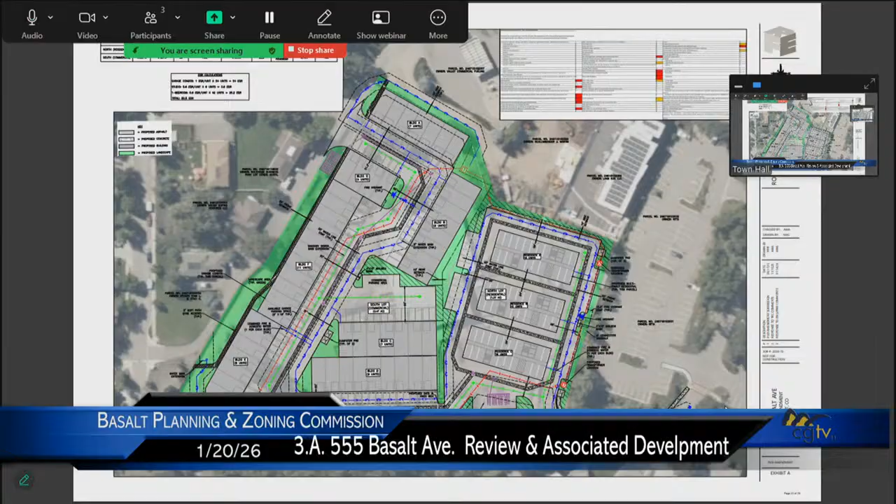The site subject to the application, as you can see on the screen, is a 4.84 acre parcel that currently houses Myers and Company. It's located in the Basalt Business Center South PUD, and it's located in the town's urban growth boundary. It's currently zoned industrial PUD, and it's partially in the Southside floodplain.

The proposal is to remove the existing buildings from the site, construct 54 commercial storage spaces on the south edge or south half of the property, as you can see in these buildings here. And then also to construct 48 multi-family residential units in 3 buildings on the north portion of the site, as you can see here.

Access is proposed to the commercial storage units from Fiou Lane on the south side of the site. And then access is proposed to the residential buildings from the existing driveway that goes to Cody Lane.

The property is located between the Basalt Park and Ride, which is located right here, and the Southside 4 subdivision, which is located on the other side of Fiou Lane. Of the 48 residential units, 12 are proposed to be deed restricted as category rental units, averaging a category 2.

And the applicants can go into more detail on the proposal as part of their comments. In reviewing the application, staff has identified a series of discussion items that are in your staff memo.

They include consistency with the master plan, the level and mix of affordable housing mitigation proposed, the exterior storage requirement waiver for the affordable housing, compatibility of the proposed use, building height, the pedestrian connectivity aspects of the project, Fiou Lane, access to East Cody Lane, and then traffic and the Southside floodplain and green building and wildfire mitigation requirements. So staff has introduced those in your staff memo that you have in your packet, and we'll go through them briefly here to give you an introduction to the discussion items.

The first being consistency with the master plan. The site is in close proximity to the Basalt Bus Rapid Transit Stop, or BRT stop, and has an opportunity to provide affordable housing in close proximity to transit to satisfy a series of master plan goals and objectives. However, the property was identified as existing land use on the master plan's future land use map.

You can see it in this location. So essentially, it was not envisioned for redevelopment during the life of the master plan when the master plan was adopted in 2020.

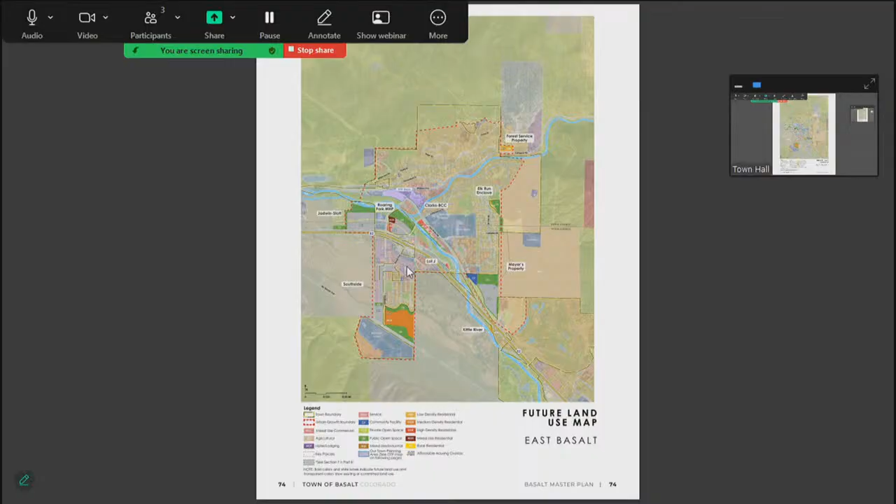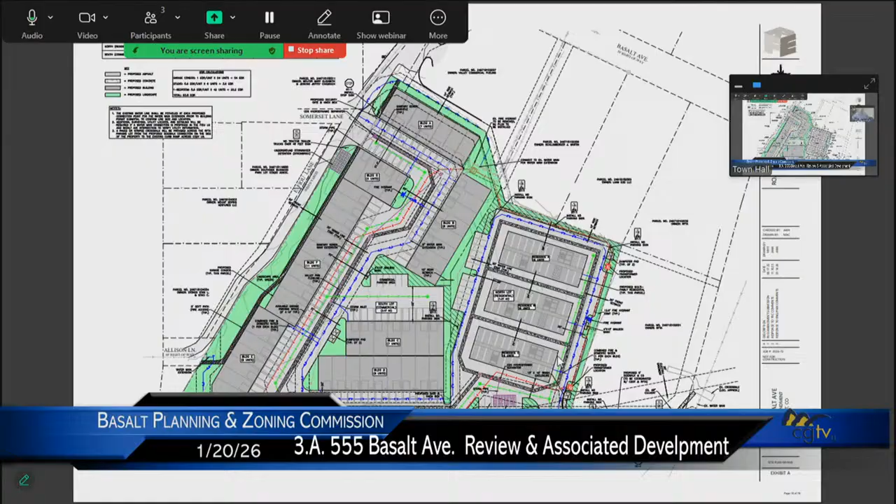A master plan amendment is required to change that designation. The typologies in the master plan identified the property as work mixed use, which envisions residential intermixed with commercial. But as noted in the site plan, the applicants have proposed that residential and commercial uses be fully separated in the project, so an amendment to the typologies would also be needed. The master plan amendments are being evaluated concurrently with the land use actions.

Going back to the discussion items, the level of community housing, affordable housing being required is a discussion item. The applicants have proposed for 12.

Could you speak louder? I really can't hear anything. Would you guys like to maybe... I don't think it's going to help.

The level of affordable housing being proposed is 12 units of deed restricted housing averaging category 2. They're proposed to be all rental units, and all of the deed restricted units are proposed to be 1-bedroom units. You have floor plans in your packet materials. The project proposes for 25% of the units and 25% of the residential floor area to be deed restricted, while the code requires 20% of the units and 25% of the square footage be deed restricted.

The Basalt Affordable Community Housing Commission, BAC, is in the process of reviewing the application, and staff will provide an update at the next P&Z meeting regarding the BAC's recommendation on the level of affordable housing as well as the unit mix proposed.

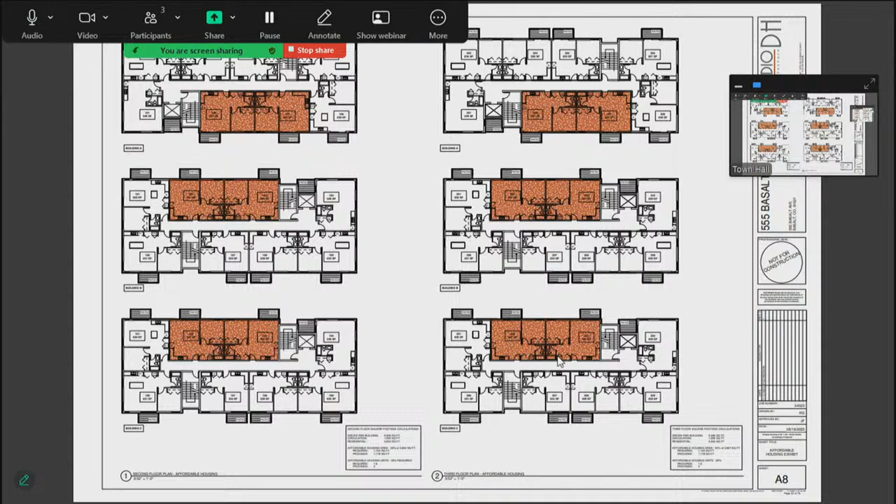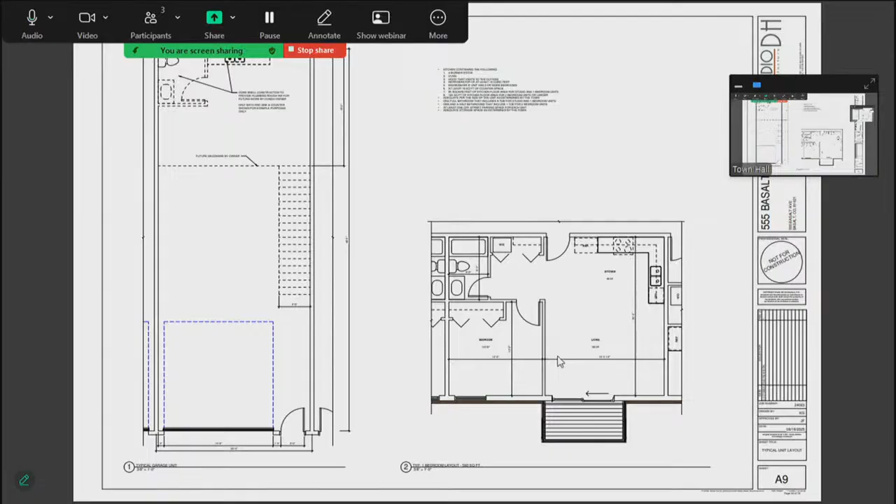With regards to the exterior storage requirement, the applicants have proposed for the deed restricted units to meet the livability requirements in the community housing guidelines, except for the requirement for exterior storage. The applicants have indicated that they can't provide exterior storage because the first floor of the residential buildings must remain open due to floodplain considerations, proposed to be open for tuck-under parking to allow floodwaters to go through the site.

In a flooding event, the Basalt Affordable Community Housing Commission is also in the process of reviewing the request for the waiver. Staff will report back on this to the P&Z at the next meeting with regards to the BAC recommendation. Other topics included the compatibility of use.

Both the commercial storage use and the accessory residential use are allowed in the industrial zone district, with residential being a special review use in the IN zone district. The master plan typology on the site would need to be amended because the current typology of work mixed use encourages intermixing of residential and commercial uses, but the applicants have separated them, with residential on the north side of the site and commercial on the south side.

In looking at the storage use, staff believes it's important that the storage remain bona fide storage because the parking and traffic generation in the traffic report are based on bona fide storage use, which would be lower than if the spaces were used as business spaces. Staff believes that's an important consideration.

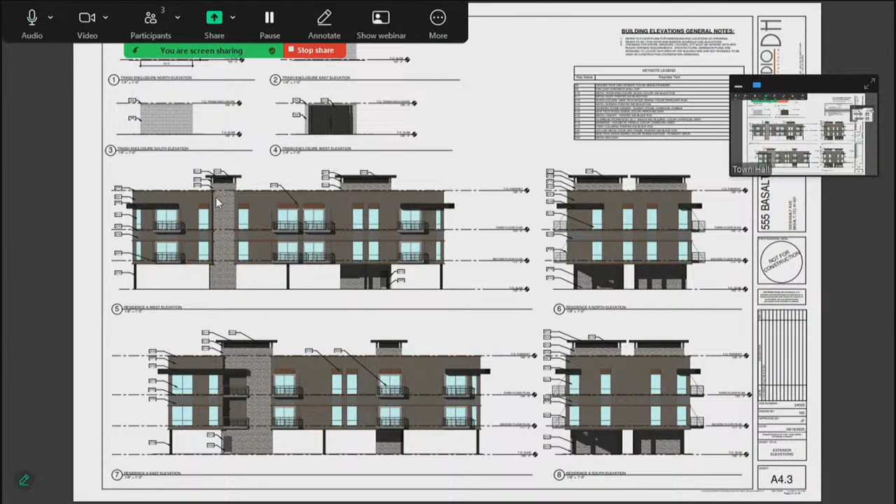Other discussion topics included pedestrian connectivity. As noted, the site is near the Basalt Park and Ride and the BRT station across Cody Lane, within a quarter of a mile. It could be a transit-oriented development, however it requires a strong pedestrian connection to the BRT, so staff has requested that the applicant establish such a connection.

The applicants did explore the potential to provide a pedestrian connection across the Basalt Park and Ride, but RFTA was not supportive of providing it across the Park and Ride. So the applicant amended their application to provide a sidewalk adjacent to the access road to Cody Lane so that it would connect to the crosswalk across Cody Lane for pedestrians to get to the BRT station.

Other discussion items relate to Fiou Lane, on the south side of the project. Fiou Lane is currently a two-way street, but it narrows down with a couple of pinch points. The police department provided comments in your packet about considering widening Fiou Lane as part of this project to better accommodate two-way traffic in conjunction with the development. The applicants have indicated they propose to maintain the current width and circumstance of Fiou Lane.

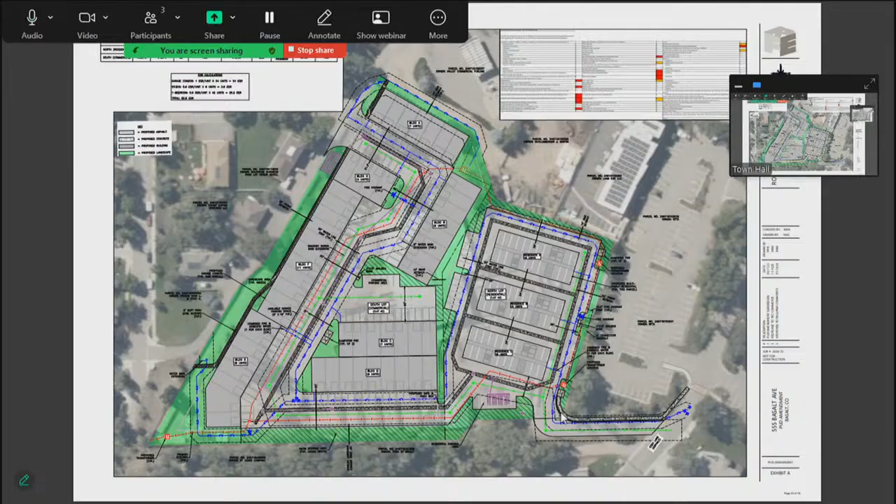The applicant has provided a traffic report in your packet materials. It indicates the development will not generate more traffic than the current Myers Steel operation, and as such would not have a negative impact on traffic at the Basalt Avenue and Highway 82 intersection.

Staff had Charlier and Associates do a third-party review of the traffic study, and his comments are in the packet materials. Charlier identified a concern that the current site traffic generation is only based on one day of traffic count in May 2025, and that a broader review of existing traffic generation is typically necessary to understand current traffic counts. The applicant's traffic engineer will be on Zoom this evening and can provide clarification on his traffic counts and methodology.

We can have Charlier and Associates attend a future meeting if P&Z desires further discussion on their comments. Staff anticipates conditions will be needed at a future meeting related to requiring contribution to the Basalt Avenue/Cody Lane mini roundabout and laneage changes, identified as a short-term solution to build capacity at the intersection. Other developments have contributed to this requirement. Additionally, it's important that the storage use remain storage and not morph into some other business use, because the traffic projections in the traffic report were based on the storage use, which has relatively low traffic generation rates. That's an important consideration in potential conditions of approval.

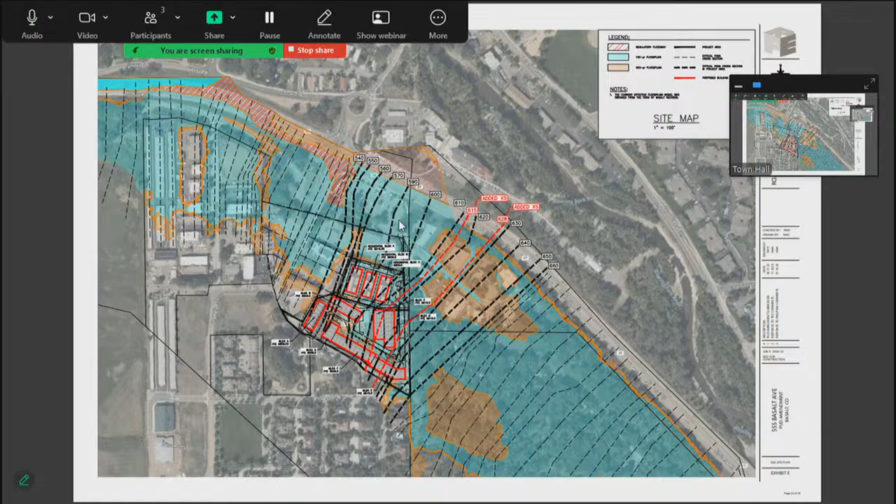Other topics include the south side floodplain. The site is partially in the south side floodplain, which goes from south to north back towards the river. The applicant has worked with the town's contract hydrologist, Robert Crable of Matrix Design, to come up with a site plan that could be developed without increasing the base flood elevation on the site. They've done so by using tuck-under parking, which allows flood flows to go through the property during a flooding event. Matrix Design believes the proposed site plan would not increase the base flood elevation and would meet the town's requirements for floodplain development.

Other topics included green building and wildfire mitigation, discussed in your packet. The applicant would be required to meet the sustainable building regulations in place at the time of the building permit, as well as the wildfire mitigation ordinance. The wildfire mitigation ordinance will need to be updated shortly because the state has passed a new wildfire code, and it requires local jurisdictions to adopt the provisions of that state code.

It is anticipated that any conditions that would be reviewed would require that they meet the wildfire mitigation standards at the time of building, and that's being updated.

So this evening, staff recommends treating this meeting as an introduction to the proposal and discussion items, considering applicant comments, taking public comments, and providing initial P&Z comments on the application, as well as identifying what additional information P&Z might need at a future meeting. Staff will also produce draft conditions of approval for consideration at a future meeting.

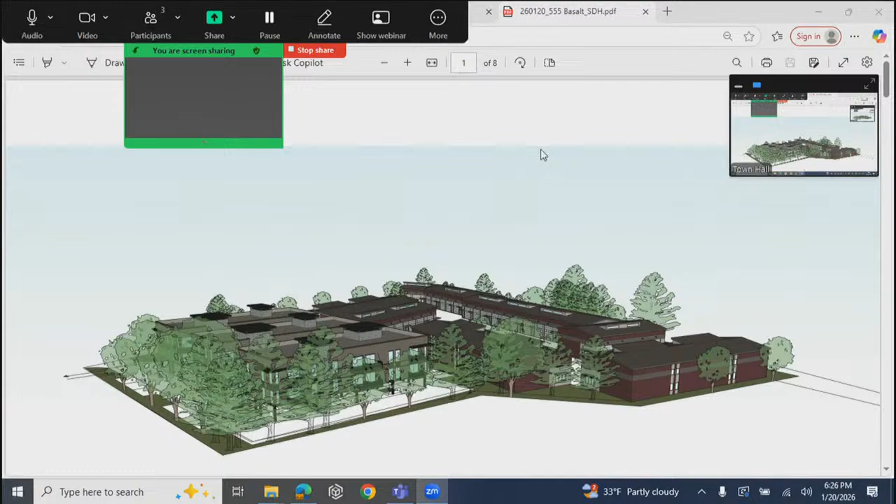So staff would suggest at this time taking applicant comments. Good evening, everybody. So we've got up on the screen a conceptual rendering of the fully built-out project.

James, I'll have you just jump to the next page. So I've included two aerials. One, at the top right, shows proximity to downtown — we didn't really catch the high school in that one, but the storage to the west — just kind of showing where we are on the site. The one on the left is a little bit more zoomed in.

So we've been working with Michelle and James for about 18 months now. We've had a lot of back and forth on this site, and the two really tricky parts of this site when we first started were the floodplain and the traffic.

We had a south side traffic study, and I think as we looked at this development, anything we looked at was about keeping traffic to what it currently was or reducing it further. That's kind of what resulted in the uses we looked at that could be available on the site within the given Business Center South zoning, and what could be placed in that area.

As James mentioned, it's currently being used as Myers Steel, a heavy industrial use that has had between 60 and 100 employees as this process has gone on. They have daily trips from both deliveries for their steel materials and also their finished product going out to construction sites.

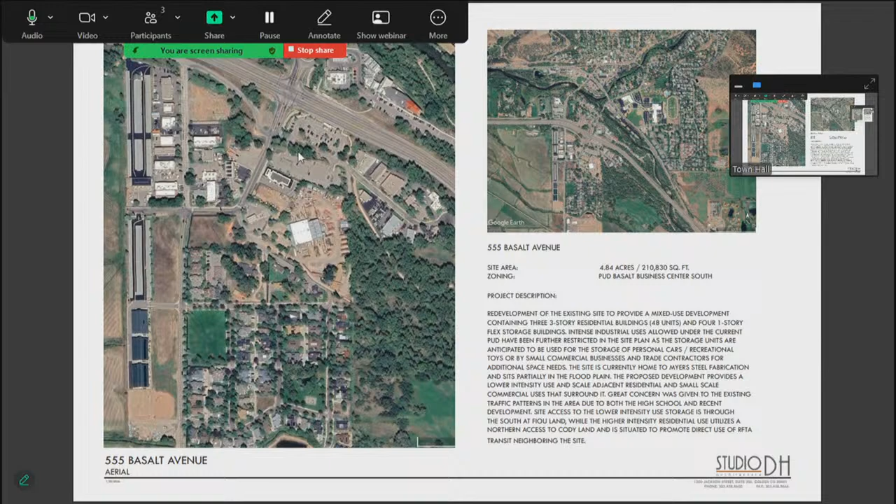This development would remove that use and have a little bit less intensity as far as construction, trucks, and traffic during the day. Just outlining the site, we've got residential uses to the south and southeast, light commercial uses to the northeast and west, and the RFTA Basalt Park and Ride to the north.

So in working with this site plan, we went through about 5 or 6 different iterations of how we could lay out the buildings to not affect both upstream and downstream neighbors with the floodplain.

Ultimately, we settled on this layout because currently you've got the 3-story mixed-use building just to the west — I believe it's an architecture firm with residential above it. We felt that the height allowances and size of that building fit in nicely with the size of our proposed building. Also, having the residential units closest to the park and ride to promote public transportation gave us the best layout.

The storage use to the south, we felt, would be a little bit shorter in height and also less intense in use, so being right up against single-family housing and some residential uses to the south gave us a stepping and scale to the south. We also tried to create a bit of a north-south arrangement for snow melting and snow plowing, which is how we got to the plan we arrived at.

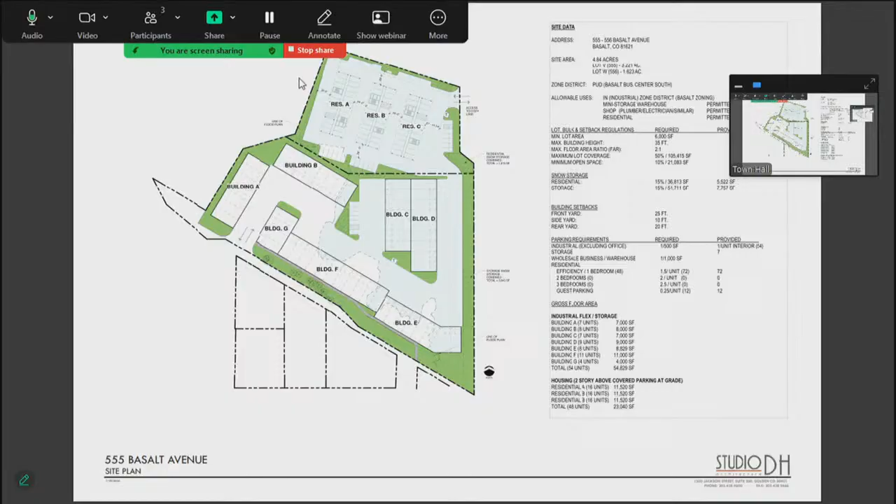We also based the number of residential units on the overall traffic counts. We are exceeding the amount of residential units that would need to be created by a commercial development of the storage nature, which we think is a benefit to the town. It could be further reduced, but we didn't feel that more storage or commercial uses would help the proposed development — it would just lead to more traffic intensity. So this is what we settled into from both a developer pro forma look and a traffic use look.

I'll have you jump to the next page.

I'll touch on a couple of things James mentioned, and I'm sure we'll get into this more. Few Lane was a big topic of discussion. Both the current owner of the Myers Steel site and a few neighbors have expressed concern about the narrowing of the street here.

We're dealing with a lot of mature trees in that area, and also a daycare on the adjacent property, plus industrial trucks coming and going. So what we did is push the access to this site as far up the road as we could to allow for that.

We looked at probably 3 or 4 different layouts of what would be required to meet the minimum street width requirements for Basalt. It would result in essentially losing all of those trees, and it would push into the applicant's property, probably 12 feet in some areas because it narrows down.

Can we jump back two slides? At the request of the fire department, but also I think both the neighbors and the applicant have seen it—there is a 5-foot soft path that goes behind the backside of those buildings. It could be used by pedestrians, but also by emergency services if there was a fire. It also creates wildfire separation between the building and vegetation, so it really serves a lot of purposes on that side.

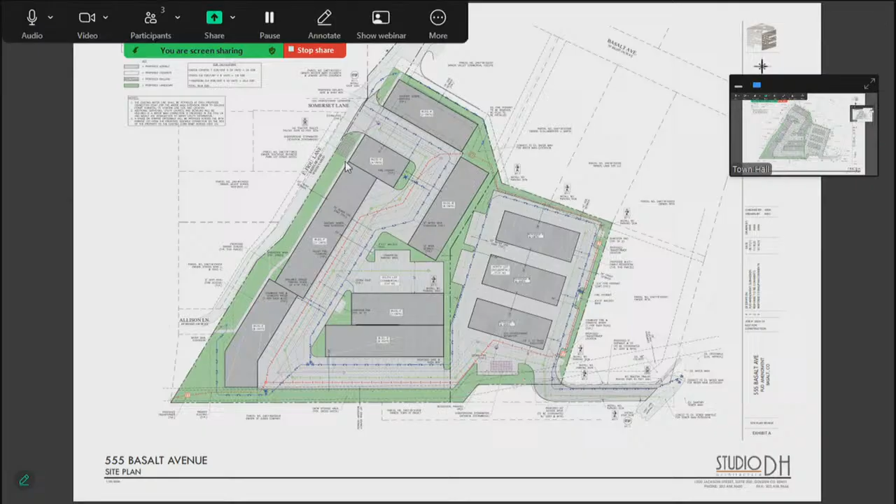We can jump to the next one. You can see some of the trees we'd be looking at—they're some of the tallest, most mature trees in the Business Center South District. We did have an arborist visit the site and do a tree inventory, so we've tried, with our landscape architect, to preserve the ones identified as having at least 50% or more life remaining, as part of this application. That was included in our submittal documents.

I'll jump to the last one. We included this just for discussion of that CDOT connection. This is, again, a tricky little corner—we've got a drainage ditch, a mailbox, and some site utilities. So for connecting that sidewalk, we are working with CDOT, with RFTA, and with the drainage company to figure out the best way we can connect, since we can't go through the RFTA lot.

I included that in the top right, I don't know if you can see it. We even looked at going down the south side of the RFTA lot, and we've got another transformer there and a lot of vegetation.

So we looked at wrapping people back around to Basalt Avenue and then down Cody Lane, but it's just really tight in that area. I feel we've made a lot of effort to find the best way to lay this out to provide that connection, and we're going to continue to work with CDOT. But that CDOT access is about 28 feet wide, so a 2-lane street and a sidewalk is getting pretty tight in that area.

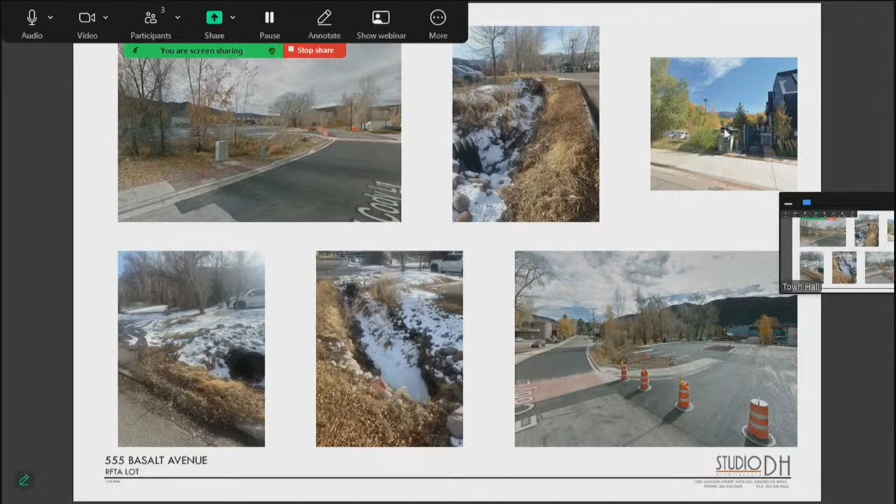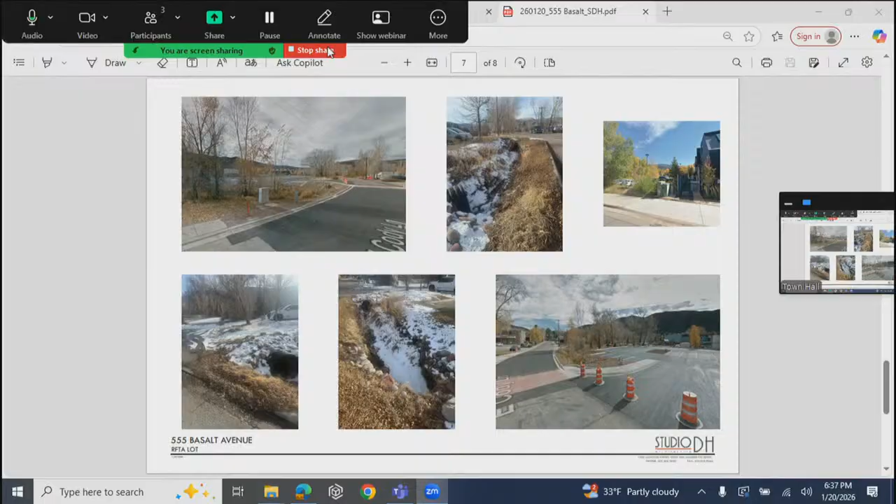I think I've touched on most of the major elements because we've got a lot to discuss, so I'll leave it at that. We've got the representatives for the owner and the engineer as well, we can go from there. The last page just has 3 more views from each direction to get a better understanding of the landscape and building height.

I'll touch real quick on the building height. The allowable height is 35 feet. My understanding with the zoning code is that's to the top of the roof. We have a 3-foot parapet wall extending up past that, so I believe it does meet zoning code height. It's just that the parapet wall extends up.

One reason is to screen any mechanical equipment up on the roof, and also for banking of snow so it's not falling off. The stair tower and elevator towers, I also believe, have the exception to exceed height because of the overruns and fire department requirements to access the roof. We'll leave it there, and we're open to any of your questions.

I can dig into that further and get you an answer. It's curious because it doesn't really make sense that you can't store, but yet we're building all these storage units on the same level. I believe what we've done with the grading plan and the way storage lays out, 3 of the 4 buildings are actually out of the floodplain because the grading changes how that floodplain works. We can take further mitigation by doing concrete foundations or extra waterproofing to help protect the storage unit side.

The difficulty is meeting the parking requirements for 1-bedroom and even 2-bedroom units. If we went up to 2-bedroom and bigger units, we start losing on that lowest level parking spaces throughout the site. So it's a balancing act of more units, more parking, more storage. I think we settled into how do we maximize units versus providing 5x5 storage closets at that lower level.

When in May was the traffic count done? Was school in session? My understanding was that it was. Okay, and so early May you said?

And what about construction traffic projections, is that included at all? Because that will be quite impactful during construction. Once this development undergoes construction, do these traffic projections include how many vehicles would be going in and out all day trying to build it? I don't believe they include that at this time. The town requires a construction management plan for that, which will be discussed later, but not until after approval, so there's no way to have any input on it?

That was it basically, except I'm not clear, you were talking about using Cody Lane instead of Few Lane as eventual access for residents, and I wasn't clear because you were saying one potential egress has a transformer box and vegetation, so where exactly would people go off of Cody Lane? That was for the pedestrian path.

So currently we have it on the west side, or the plan north. We're showing the street on the bottom of the page, and the sidewalk would wrap around right there where James is highlighting it. We wanted to keep it on the closest side to the residential, but that's also where the drainage ditch is. Oh okay, so it was just the pedestrian traffic you're talking about diverting, not vehicle traffic. Got it.

Okay, those are my questions for now. All right Mike, do you have any questions? Essentially you're having two very different access points for the two different entities. We wanted to split the uses so that we had residential and storage, the more storage being a commercial use.

We talked with Brooke Stott at Roaring Fork Fire, so that discussion has been brought up about how they circulate and navigate through. We've done fire turning analysis of a fire truck working its way through from the access on Cody Lane and from Few Lane. So they can drive in one and come out the other.

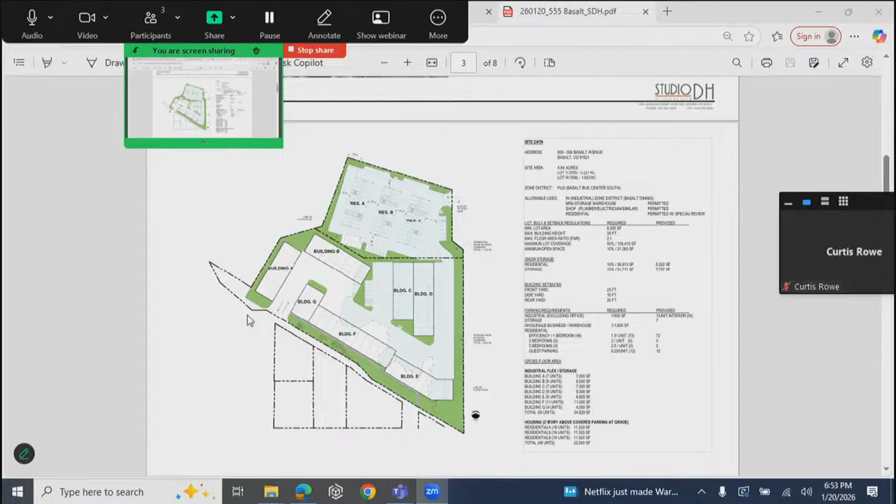It varies, there's a lot of overlap. If you notice, there's the little triangular part of the current Myers property that jogs up there. So there's currently kind of a remnant access easement there, and we might have more property lines on the next page, and we might not catch it.

I guess ultimately my question is, could Few Lane accommodate two-way traffic to the west of Somerset egress without being a two-lane all the way through?

Let's go back to the site plan and you can ask that question again here. So you're asking, can it be two-way here and then transition to one-way for the rest of it? Yeah, you have Somerset Lane directly across from their egress point, can that section of Few Lane accommodate two-way traffic per the request of the fire department?

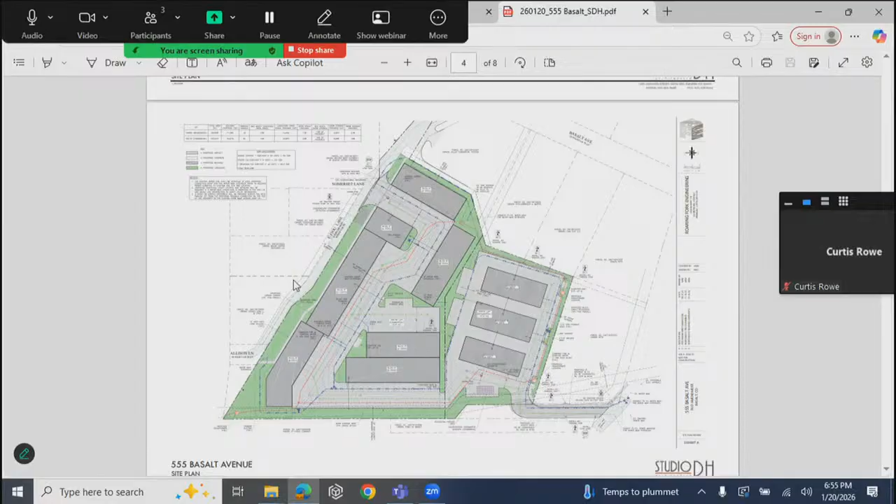Can someone define where is it in here? I think it's in one of the letters, it's the Few Lane Sneak. What is that, and how is it being utilized by high school kids? The Few Lane Sneak is essentially high school traffic, when it's letting out, using that as an alternative to get around the traffic that's backed up on Southside Drive.

So they come out Somerset or like out Allison? They come down Allison and then Few to avoid waiting at the roundabout. They go into the neighborhood and then come out. Okay, that's what I was trying to figure out, that definition of what that is referring to. Yeah.

No other questions at this time? Okay, I have some questions. First off, for our next meeting, could staff or somebody provide a simplified drawing of the CDOT drive lane?

A lot of this confusion is because of how they do engineering site drawings now, where line weights are all kind of the same and line types are all kind of the same, so they don't really delineate what's a property line and what things are. So if we could get a simplified drawing so we see whose property is what, and what the widths are at Few Lane, because that's kind of a point of contention. A more clear drawing would help us all talk about it and talk about the same thing, so that would be useful.